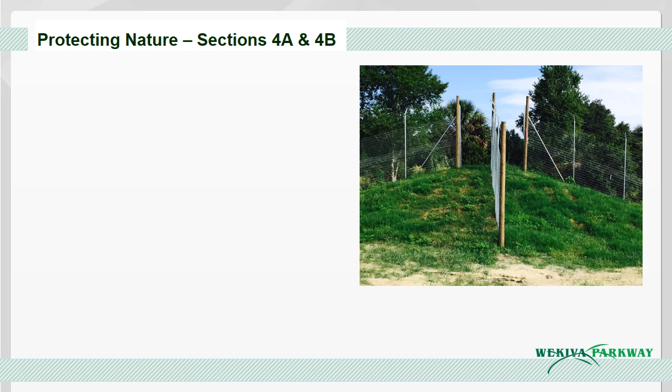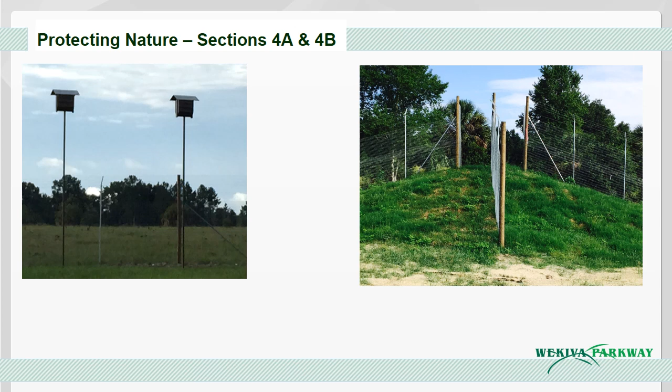Some of the environmental protections can be seen here on the first sections of the Parkway, sections 4A and 4B. On the right is a wildlife jump out that will allow animals who may wander onto the corridor to safely exit. On the left, bat houses will provide shelter to as many as 1,200 animals each. The floodplain bridge in the middle of this section during the dry season will allow animals to pass under the Parkway safely. Wildlife fencing is 10 feet tall, with 2 feet underground to discourage animals from digging into the corridor.

This section opened on January 20th, 2016. It was built on one of the several large parcels that were purchased for conservation as required by the 2004 Wekiva Parkway and Protection Act. Lighting will be installed only in limited locations along the project to preserve the natural look and dark skies initiative for this environmentally sensitive area.

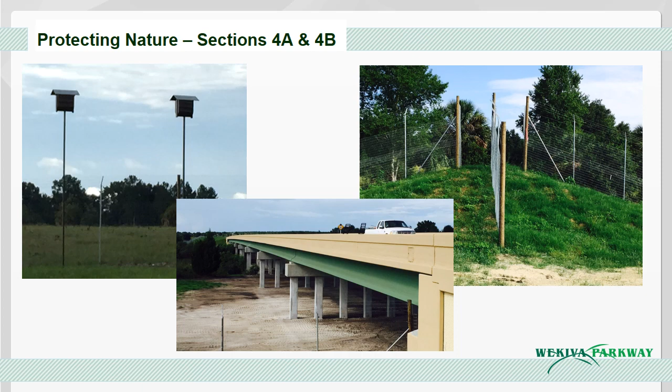The Florida Department of Transportation is developing a trail that will parallel about 10 miles of the Wekiva Parkway. The trail is being built as part of the overall construction on sections 5, 6, and 7A. A separate project will build the trail along sections 4A and 4B beginning in 2020. Once complete, the Parkway Trail will connect to future extensions of the West Orange and Seminole Wekiva Trails, as well as connect to the new Lake Wekiva Trail planned by Lake County.

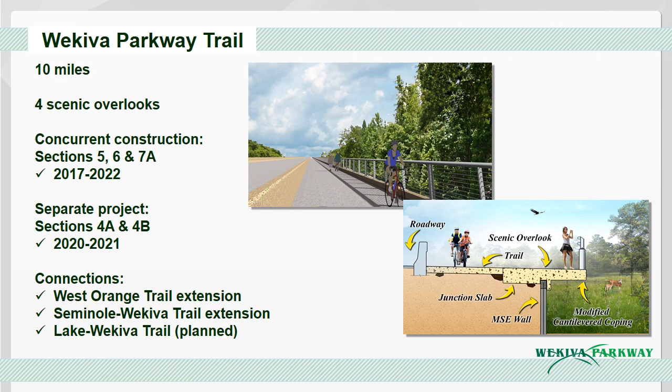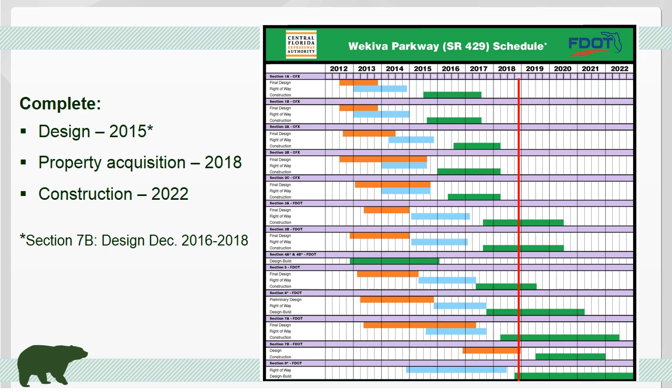FDOT will open its next sections in 2019. Basically, the plan is to have a new section open every year or two until all of the parkway is open to traffic by late 2022.

Tonight's focus is on the last part of the parkway, Section 8. This section will make the connection to I-4 and State Road 417.

Section 8 is a design-build project that involves building 2.63 miles of toll road from Orange Boulevard across I-4 to east of Reinhardt Road. The project includes the new Wekiva Parkway Interchange at I-4 that will connect with State Road 417, completing the beltway around Central Florida.

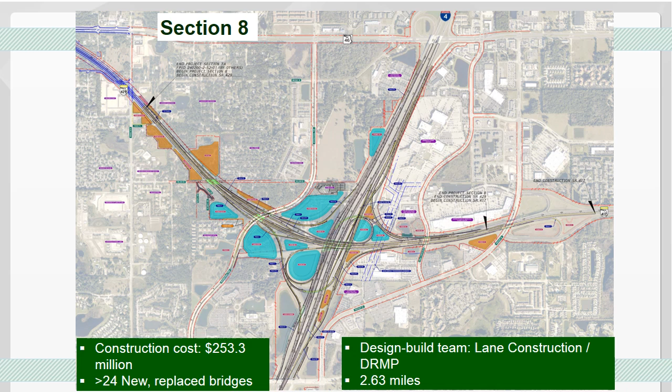This exhibit is looking from State Road 417 on the east side of I-4 towards International Parkway and State Road 429 on the west side of the interstate.

The selected design-build team is planning a tight urban interchange at I-4 and International Parkway. This new design eliminates the existing State Road 417 on and off ramps at International Parkway. The design-build team has narrowed the State Road 429 and ramp footprint, which nudges the roadway away from residents a little more on the west side.

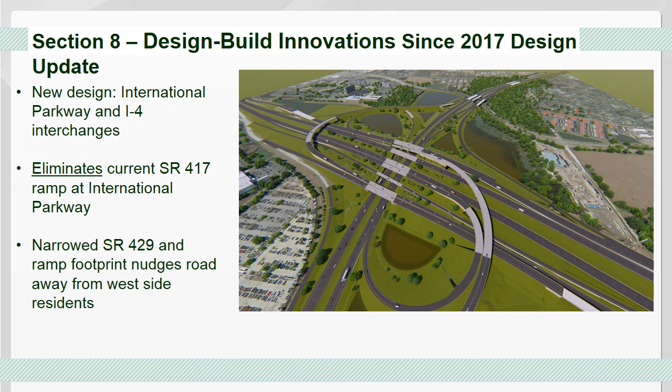This exhibit is looking along State Road 429 to the east to I-4 and State Road 417. Initial work will be outside of public traffic areas, resulting in fewer public impacts early on than the previous designs. The new interchange design at International Parkway means northbound traffic won't have to make a U-turn to turn into the Ballantrae apartments.

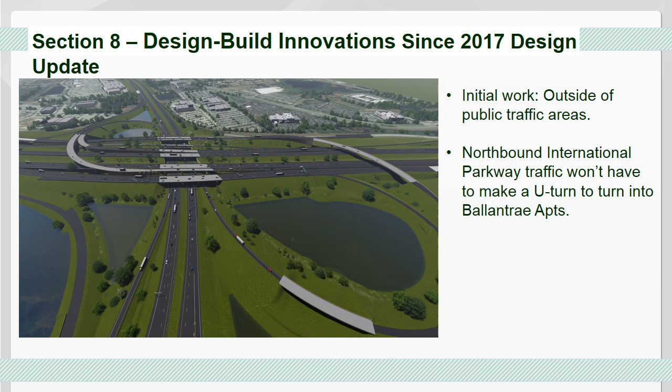There is significant overlap on Section 8 with the department's future I-4 Beyond the Ultimate Managed Lanes project. Wekiva Parkway Section 8 includes building the general use lanes, or non-tolled lanes, for the I-4 Beyond the Ultimate project. The I-4 BTU express lanes will be built during a future project. Section 8 will provide a direct connection from the I-4 express lanes in the future to State Road 417 and State Road 429.

A historically low area will be used as a floodplain compensation pond northeast of the Parkway and Wilson Road. The pond will be scraped down to add storage capacity for runoff from major storms. Once complete, the pond will be landscaped. FDOT will work with the community in developing the landscaping plan. Landscaping will be installed after all of the major work is completed on this project. The pond will not be fenced.

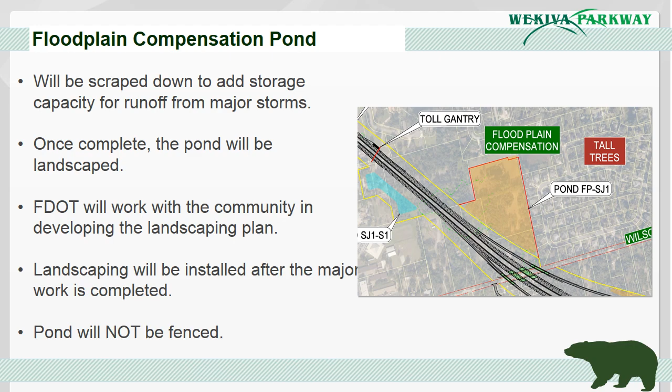This project involves significant utility work, so unintended outages are possible. We will do what we can to try and minimize these construction impacts. The department posts news about lane and road closures on wekivaparkway.com. You can also follow the project on Facebook and Twitter for real-time updates.

Motorists should always obey the posted speed limits, safety signs, and devices in the work zone. Drivers should be mindful of construction vehicles entering and leaving the roadway. We also will provide the community with advance notification of lane and road closures, detours, and night work whenever possible.

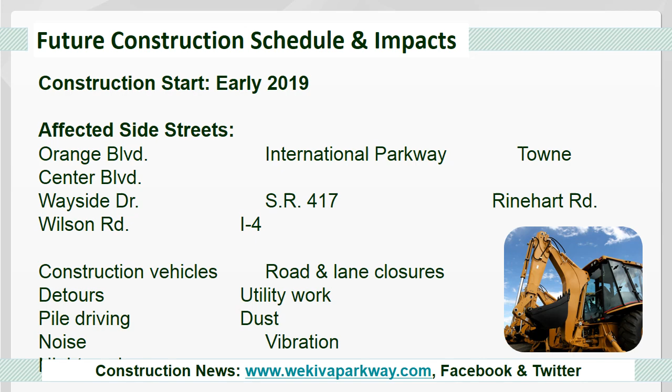Here are some of the activities that you're likely to see early in the Section 8 project. Crews are scheduled on November 16th to begin relocating gopher tortoises, a keystone species, out of the way of construction. That is expected to take several weeks. Other activities likely will include clearing trees and debris and setting up safety equipment and devices.

The design build team will be continuing to develop the latest plans for the project even as other work gets underway. The major construction activity is scheduled to begin by early 2019.